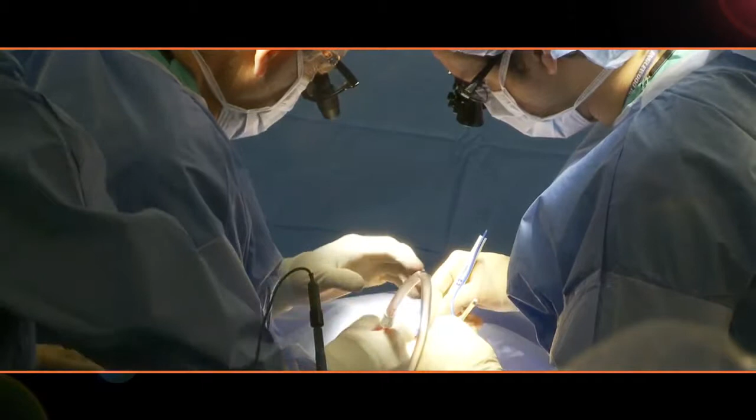Based on empirical evidence, as well as calculation of death benefits of litigated cases, our estimates indicate that the cost of life can range from $250,000 to $4 million, and claims for non-fatal accidents can range between $25,000 to over $1 million.

These settlements are usually dependent upon a number of factors, such as the severity of the accident, the age of the individual, loss of income earning potential, as well as the state in which the case is litigated, among other factors such as emotional distress. Not factored into these figures are the added costs of attorney fees and expert witness testimony. Avoid these costs up front with preventative action by investing in appropriate safety products and get adequate training on the proper use of these products.

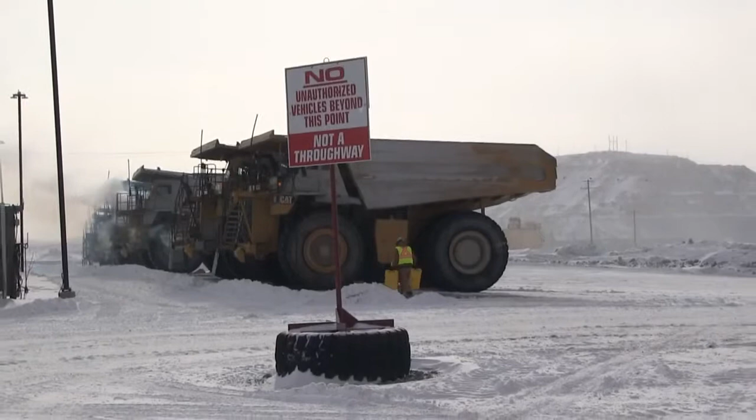This short video will take you through a few simple but necessary steps you need to learn in order to chock your vehicles and equipment effectively.

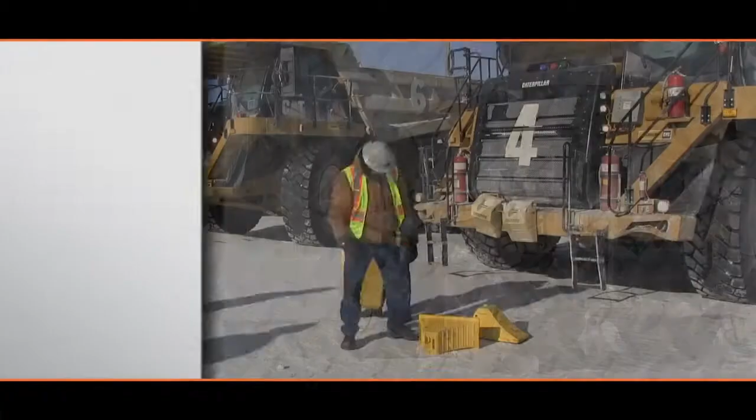Selecting the appropriate wheel chock. Before you chock a wheel, you need to be sure you've selected the correct type and number of chocks for the vehicle. First, cross-reference your vehicle's gross vehicle operating weight and tire diameter with the correct chocks on the Checkers Wheel Chock Reference Guide. The wheel chocks referenced in this guide are based on 3 important factors. First, the gross vehicle operating weight, or GVOW. The heavier the vehicle gets, the stronger the wheel chock needs to be.

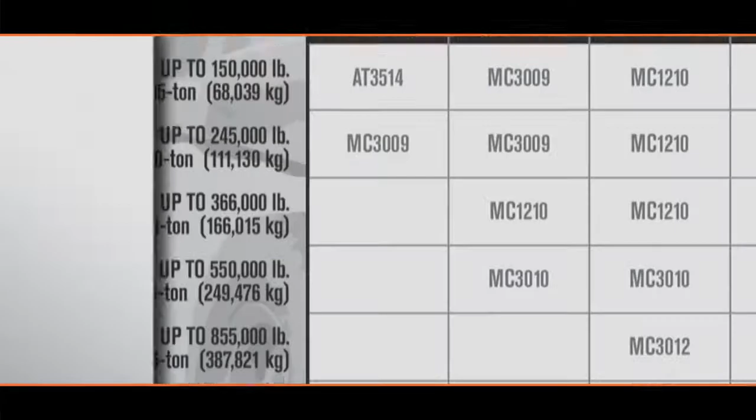The second factor used to decide which chock you should select is tire diameter. This chock is too small and doesn't fit the wheel curvature. This would enable the vehicle to roll right over the chock. This chock is the correct size and curvature for the wheel size.

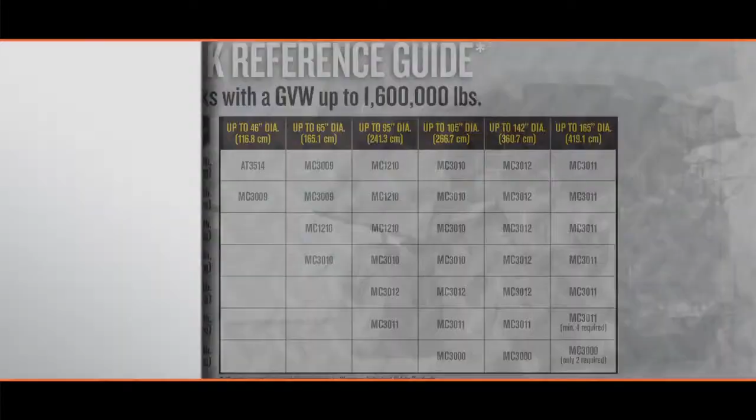The third factor to consider is ensuring you have the appropriate number of chocks for the vehicle. For example, haul trucks with a payload greater than 240 tons will require the use of 4 Monster MC 3011 chocks, but always make sure you use the Checkers Wheel Chock Reference Guide to identify exactly the type and number of chocks you should be using for your vehicle.

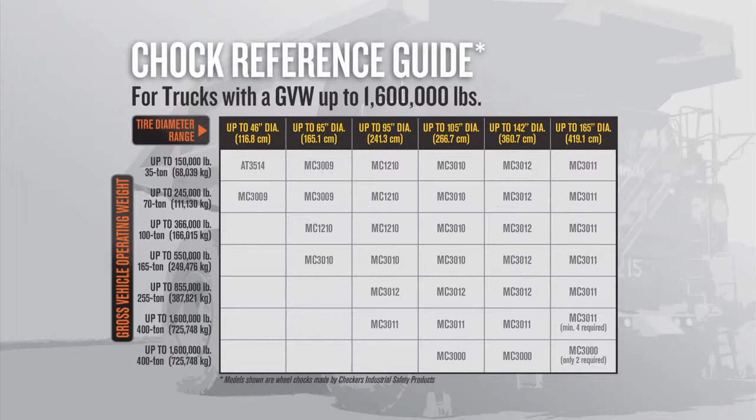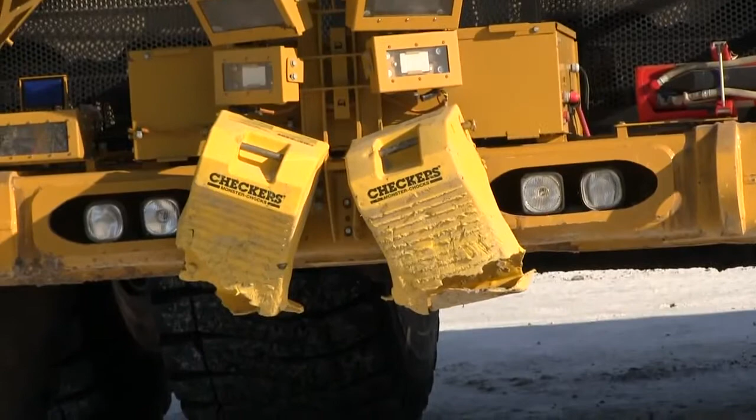Inspect your chock. Wheel chocks should be inspected prior to use to ensure they are free from visible defects. If you see any signs of deterioration, such as cracks, chips, signs of stress, breakage, collapsing, or any type of deformation which may affect the performance of the chock, then it should be discarded and replaced immediately. Once you're sure the chock is in good working order, you can begin to use it to chock the vehicle.

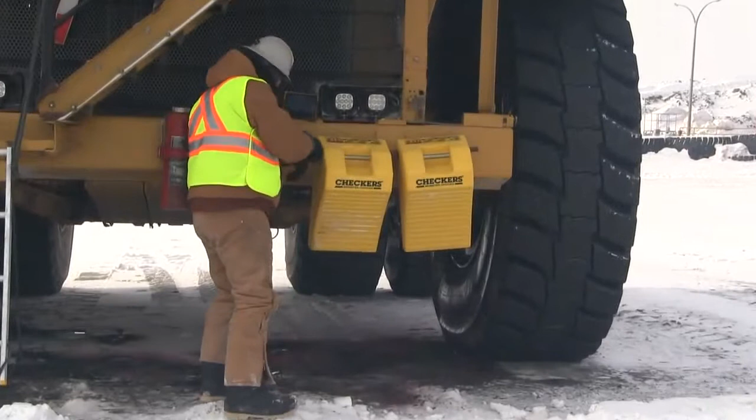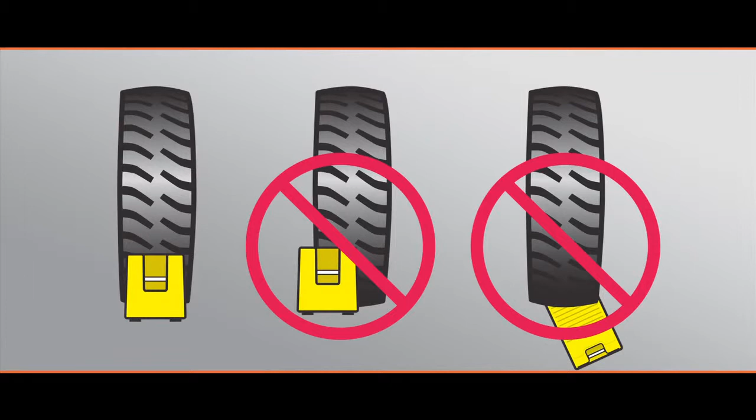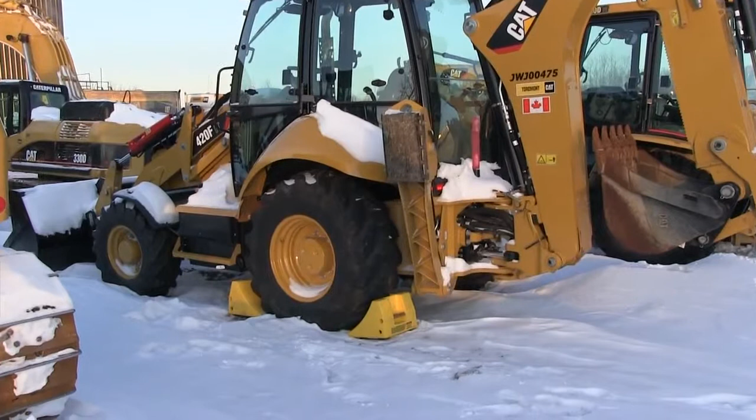Proper wheel chock placement is critical for the overall performance and effectiveness of wheel chocks. The chock should always be placed squarely and firmly in the center of the tire tread. There should be little to no gap between the tire and the chock, and you should always chock on the downhill side of the tire. What follows is a quick summary of how many chocks you should use and where they should be placed for the different vehicles and equipment common to the mining industry.

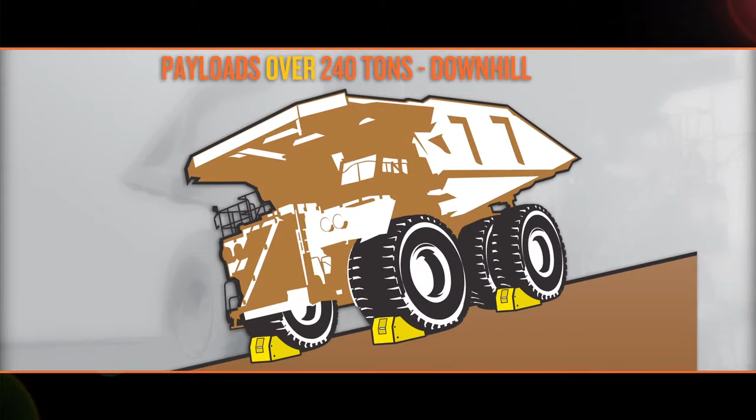Chocking a haul truck with a payload greater than 240 tons. When chocking a haul truck with a payload greater than 240 tons on a downhill grade, you need to place the chock on the downhill side of each of the front tires and place 1 chock on the downhill side of each of the outer rear tires.

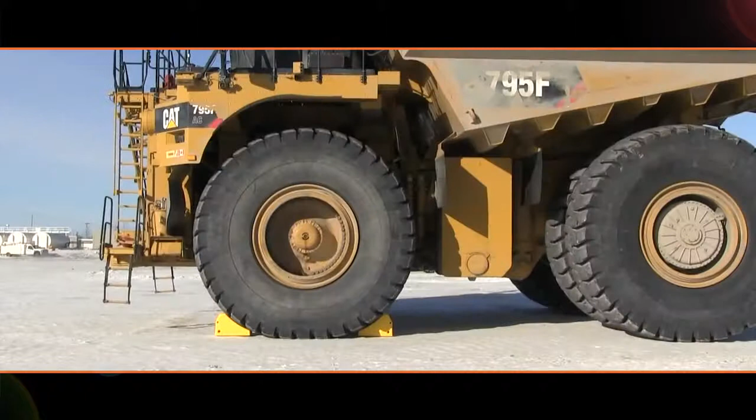When chocking a haul truck with a payload greater than 240 tons on an uphill grade, you need to place 1 chock on the downhill side of each of the rear tires. If you're chocking a haul truck greater than 240 tons on a level grade or one that is undetermined, then you should place 1 chock on each side of the front tire on one side of the vehicle.

Chocking a haul truck with a payload less than 240 tons. When chocking a haul truck with a payload of less than 240 tons on a downhill grade, you need to place one chock on the downhill side of each of the front tires. When chocking a haul truck with a payload of less than 240 tons on an uphill grade, you need to place one chock on the downhill side of each of the outer rear tires. If you're chocking a haul truck with a payload of less than 240 tons on a level or undetermined grade, then you should place one chock on each side of the front tire on one side of the vehicle.

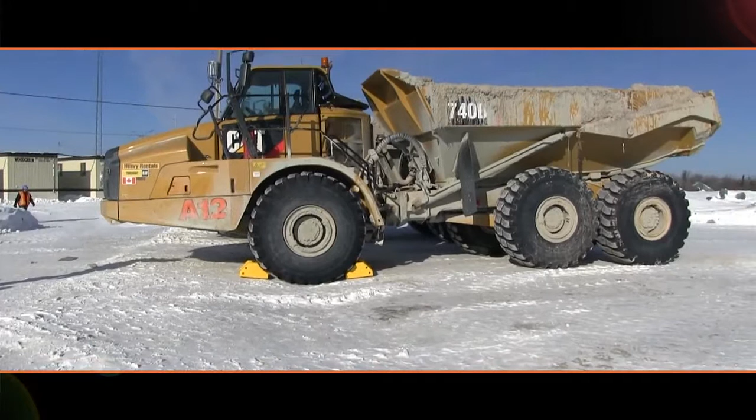Chocking articulated trucks, 3-axle. When chocking articulated trucks with 3 axles on a downhill grade, you need to place one chock on the downhill side of each of the tires on the center axle. When chocking an articulated truck with 3 axles on an uphill grade, you need to place one chock on the downhill side of each of the rear tires on the furthest downhill axle. When chocking an articulated truck with 3 axles on a level or undetermined grade, place one chock on each side of the front tire on one side of the vehicle.

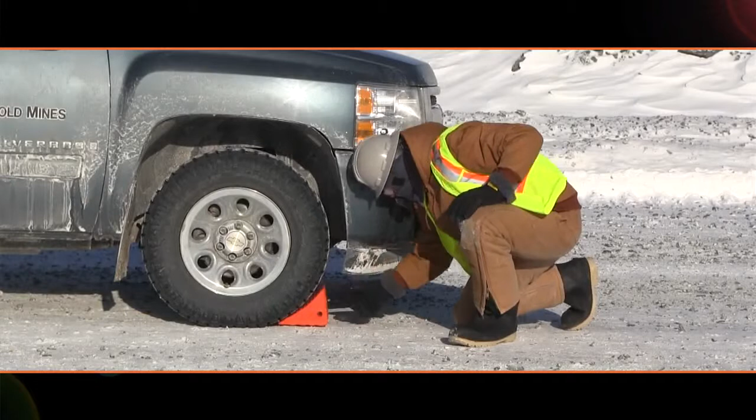Chocking mine support equipment with 2 axles. When chocking mine support equipment with 2 axles on a downhill grade, place one chock on the downhill side of each of the front tires. When chocking mine equipment with 2 axles on an uphill grade, place one chock on the downhill side of each of the rear tires, or the outer rear tires if applicable. When chocking mine support equipment with 2 axles on a level or undetermined grade, place one chock on each side of the front tire on one side of the vehicle.

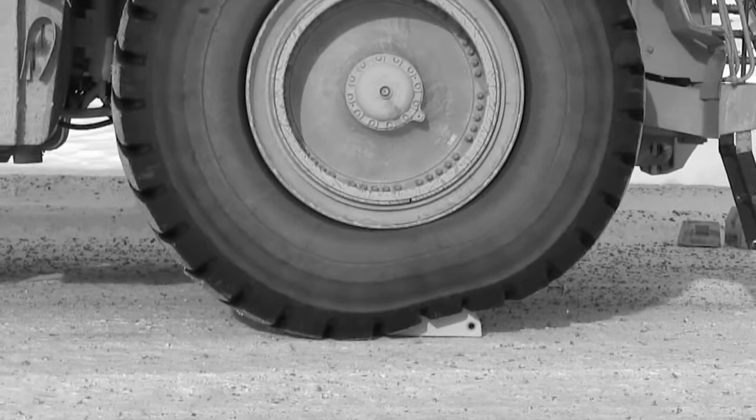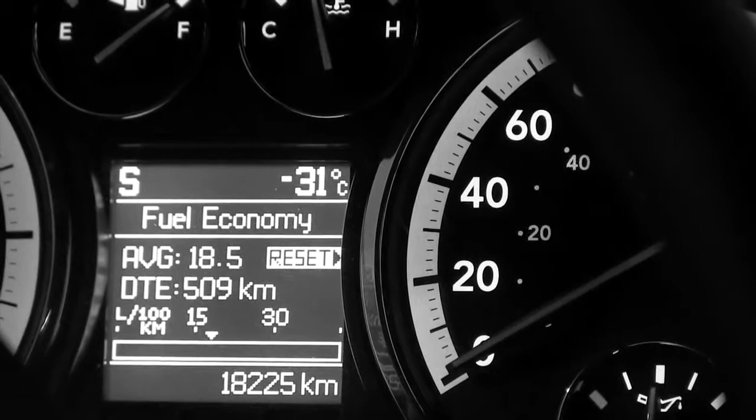There are a few additional factors that can affect the performance of a wheel chock and should be taken into consideration. 1. Tire type. Radial tires by design deflect more than a bias ply tire. This flexibility allows the tire to wrap around the wheel chock, reducing the chock's effectiveness. 2. Tire pressure. Varying tire pressures that naturally occur with changes in the environment can also affect the performance of the chock. 3. Condition of ground surface. The condition of the ground, such as firm, soft, wet, dry, icy, and frozen, may also affect the performance of the chock.